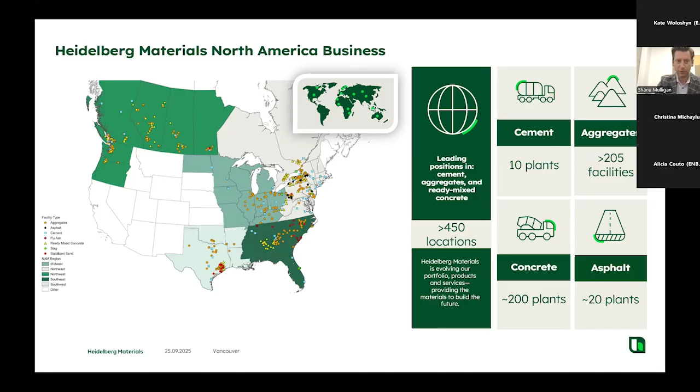I'm located in Calgary, Alberta, in what we call our Northwest region, which is essentially the Manitoba-Ontario border west to the coast, and also includes the states of Washington and Oregon. We're a little unique in that the Northwest region also has concrete pipe and some asphalt divisions, which isn't super common throughout our entire network. But cement, concrete, and aggregates are definitely the core of our business and what we're concentrated on in North America.

The one to draw your attention to is that 50% of our revenue will be generated from sustainable products by 2030. That includes products that meet certain carbon thresholds, but also those that incorporate circularity principles like the use of recycled concrete aggregate. I think we're currently at around the 35 to 40% range, so we've got a little bit to go to get to that 50% target by 2030.

Another target is 400 kilograms of CO2 per ton of cementitious material. That figure probably feels somewhat abstract to many on this call, but the old rule of thumb used to be that 1,000 kilograms of cement meant 1,000 kilograms of carbon. That's changed a little with some best practices rolled out globally. For context, the carbon intensity of our best plant in North America is located in Delta, British Columbia, just outside of Vancouver, and that has an EPD of 679 kilograms of CO2 per ton of Portland limestone cement out of that facility. So quite a ways to go to reach that 400 kilogram goal.

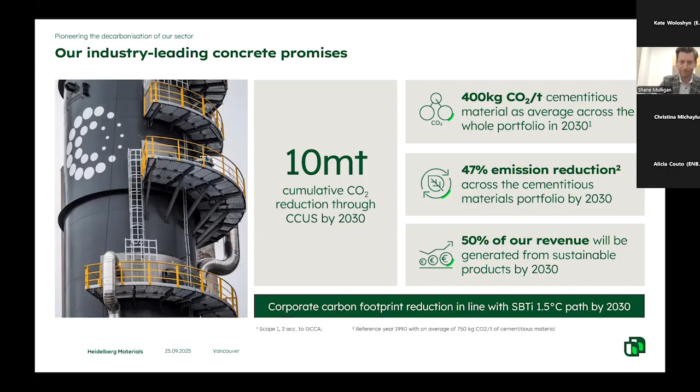Getting into more detail of today's presentation, we're here to talk about embodied carbon, and I think there's probably a general understanding of what that means among those participating in this call. But some of the drivers for embodied carbon are starting to come more to the forefront in our day-to-day activities. We have quite a number of different regulations and policies being rolled out across Canada and throughout North America that are focused on reducing embodied carbon in the built environment.

These are above and beyond the requirements you might be pursuing with the LEED Green Building Rating System or the Zero Carbon Building Standard with the Canadian Green Building Council. If you're in an area like Vancouver, the city of Langford, or even the city of Edmonton, there are some policies starting to affect day-to-day projects.

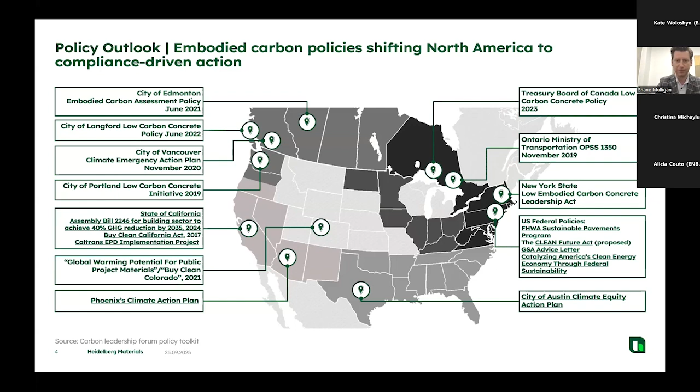When we're talking about embodied carbon, we're generally talking about concrete, because concrete, as you know, is one of the largest embodied carbon contributors to most types of infrastructure. When we're talking concrete in the built environment, particularly vertical construction, we find that 50% is generally the ballpark of where concrete contributes to the overall carbon footprint of a building.

Sometimes it's a little less, like in a residential single-family home, but it could even be more if you're looking at a very tall high-rise building with a very deep parkade structure. You could be looking at a concrete contribution to your project of about 70% or so, which creates a bit of a problem, but also an opportunity to really dig into concrete and look for lower carbon opportunities to lessen its impact on your project, while still getting the benefits concrete provides from a structural perspective, a climate resilience perspective, et cetera. So I'm going to dig into some practical strategies today to help enable that.

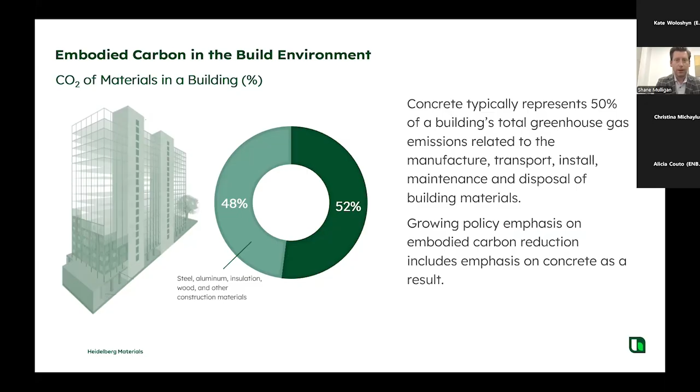Understanding that everyone's familiarity with concrete is probably at a slightly different level, I've got this slide to set a little bit of context as to why the carbon footprint of concrete is so high.

You may have heard the stats that concrete generally represents somewhere between 5 to 8% of global greenhouse gas emissions. That is a very large amount of emissions to be associated with one industry. If concrete was a country, it would be the third largest country in the world next to the United States and China. So there's definitely a lot of heavy lifting that the industry is able to do or needs to do to lessen that impact.

But this graphic helps to illustrate where that impact is coming from. It's a life cycle assessment of concrete as a material, where you're looking at the mining of the raw materials themselves, which generally is not a carbon intensive process. You're taking raw limestone to help make your cement, raw gravel and sand out of local quarries. It's generally just a little bit of dynamite, some on-site emissions associated with diesel trucks, etc. In the grand scheme of things, though, very small contributions to the carbon intensity of concrete.

Then you have the cement manufacturing process itself, and that really is the elephant in the room when it comes to the carbon footprint of concrete. Despite representing only 10 to 15% of the concrete mix, cement contributes somewhere in the range of 80 to 85% of the total carbon intensity of that concrete. So it is definitely the main contributor to why concrete is considered a carbon intensive material, and that relates to the process of making cement itself.

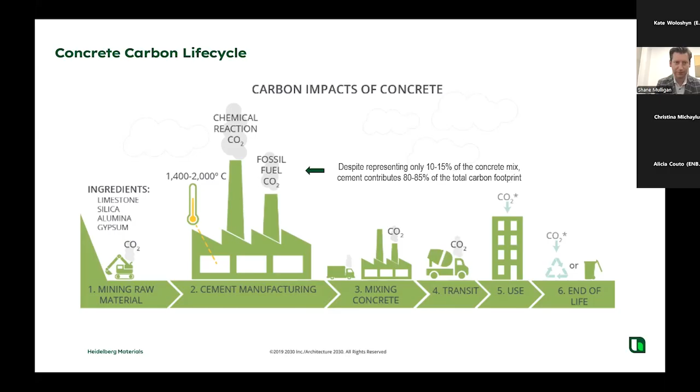And then from a use perspective, concrete is famously durable and long-lasting. Not a lot of maintenance or repair or replacement that's necessary over the life cycle of a building. Whether it's a 60-year lifespan or a 100-year lifespan, concrete stands up relatively well versus other construction materials. And then finally, at end of life, concrete is generally considered endlessly recyclable, being able to be put back into fresh concrete in some circumstances, or be used in other applications such as road base or subbase work with asphalt construction or concrete.

So having an understanding of where the emissions are coming from helped to understand how we arrive at low carbon concrete. And low carbon concrete is basically two things: it's reducing the carbon intensity of the cement that you're consuming. As a vertically integrated manufacturer of cement and concrete, we're busy on both sides of that equation, trying to reduce that impact. But more so on the concrete side, it's how do you make the most efficient use of that cement that you're putting into the concrete to help lessen the impact in the overall matrix of that concrete that you're making.

At Heidelberg, we have a branded low carbon concrete offering known as EvoBuild. EvoBuild is a tiered offering that provides increasing levels of carbon savings when compared against an industry average benchmark. In Canada, the benchmark we've utilized for this program is the 2017 Canadian Ready Mix Concrete Association industry-wide EPD.

That EPD was built by essentially taking a survey of a statistically representative number of concrete plants throughout Canada, figuring out what a typical concrete mix looks like for 20 MPa, 25 MPa, 30 MPa, etc., assigning carbon intensities for all the different constituents that make up that mix, and figuring out what an average carbon intensity is for 35 MPa, 45 MPa, etc. concrete.

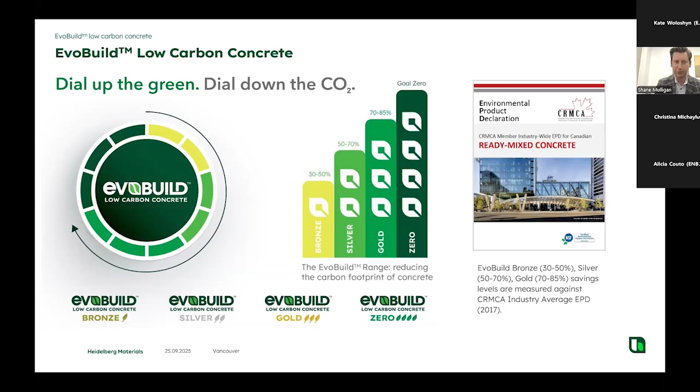The way we deliver these carbon reductions is really about materials engineering principles. Our technical service teams are generally looking at the different levers at our disposal to help reduce the carbon impact of the concrete matrix as a whole. That involves looking at the aggregate gradations to get better particle packing and more strength out of the aggregate structure itself, which helps pull out some of the cementitious content that might be going into that concrete.

Looking at different novel admixtures or different combinations of admixtures to help either reduce the water demand or increase the strength of the concrete mixes is another strategy that's becoming more typical. There's a lot of great research going on in that space to help strengthen the concrete and reduce the cementitious contents.

Secondary cementitious materials, that's looking at things like fly ash, a waste product from the coal industry, or slag, a waste product from the steel industry. Generally speaking, in Alberta we're concentrated mostly on fly ash. That's probably the most popular lever, and the one people generally have in mind when talking about lower carbon concrete—using materials like fly ash to displace the amount of cement going into your concrete mix.

But we're also trying to move away from that being the de facto solution. Yes, it is a significant lever we can pull to help reduce the carbon intensity of your mix, but it's not a full scale or holistic view of the overall carbon intensity of the concrete. We're trying to focus more now on the global warming potential of the concrete matrix as a whole, but nonetheless do utilize some of those SCM strategies.

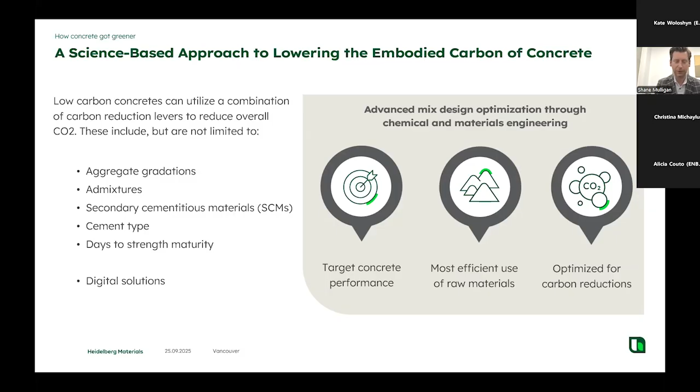They're just not going to be as low carbon as they would be if we're able to extend that schedule out. Many of these new solutions are also able to be enhanced with different digital technologies that exist, which I may touch on later if there's time. But at the end of the day, for any given application, we're really starting with performance. There are certain performance expectations that concrete needs to meet, regardless of the carbon intensity. Then we look at the levers to make sure we're still hitting performance, but pulling each lever to the maximum extent possible, balancing trade-offs with schedule and cost. Performance is definitely still paramount with the various solutions we introduce with our EvoBuild options.

But not everybody in the design space looking at reducing the carbon intensity of their project is familiar with the specifics and nuances that come with concrete. It's important to be at least educated on a high level as to the implications of some of these different levers and solutions I highlighted on the previous screen.

In particular, with the use of SCMs like slag and fly ash, it seems like a very easy lever to pull to reach 20%, 40%, 70% substitutions. But there are important trade-offs to be aware of with these strategies. It's really great to work with your concrete producer to figure out what works for your local project and environment, to have a good understanding of what that means. Generally speaking, as you substitute higher levels of fly ash or slag, you start to see impacts on the performance of your concrete mix, including increasing the curing time, so slowing down the schedule for strength gain within that concrete matrix.

So that might not be an option past 20% in fly ash, for example. As you move to 25, 30, 35% substitution, you might incur schedule impacts that are just not acceptable with your construction goals. Or even with things like pumpability, workability, or finishability of the concrete, the amounts and types of SCM you're utilizing can impact that. It's important to have that understanding in balancing what you're trying to achieve with your carbon reduction goals.

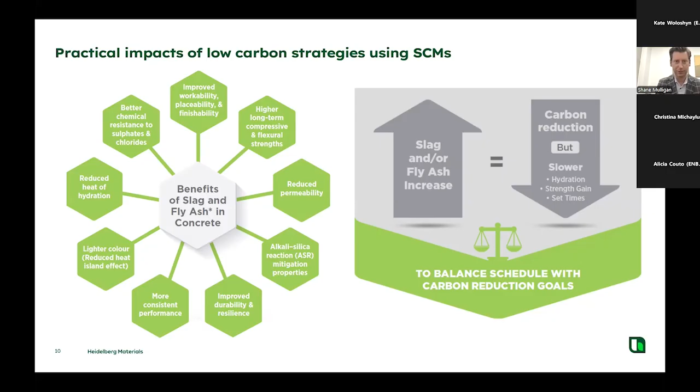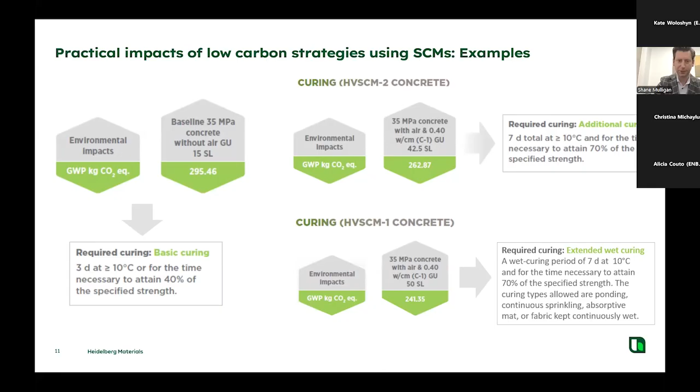Additionally, there are on-site considerations that come into play with higher levels of substitution rates. These graphics come from the CRMCA Low Carbon Concrete Guideline, where they look at different options for 35 MPa concrete at different substitution rates. At 15%, that's pretty much the concrete everybody's used to - there's no additional curing requirements on site. But as you significantly increase that substitution rate from 15 to 42.5 or even 50%, highlighted in the bottom right of the screen, there are additional curing considerations. Again, that's going to impact your construction processes, but also potentially the construction schedule. It's just making sure you're aware of these implications as you look at the different options available to you.

Exposure class is another important consideration. As concrete is exposed to more aggressive environments, whether it's chloride penetration, sulfates in the soil, road salting, whatever the case might be, the concrete matrix needs to be denser to stand up to that attack. So as you get more aggressive exposure classes, you get more dense concretes, which generally has the effect of increasing your carbon intensity because you're using more cementitious content to hit those higher densities.

Unfortunately, within environmental product declarations being published right now, it's not mandatory to highlight what exposure class your concrete is being designed towards. So we're finding a bit of an imbalance right now as to how EPDs are being used and compared, because that factor is not currently being listed on your EPDs.

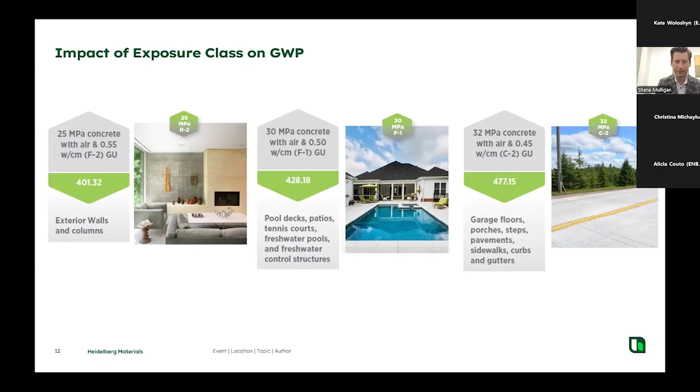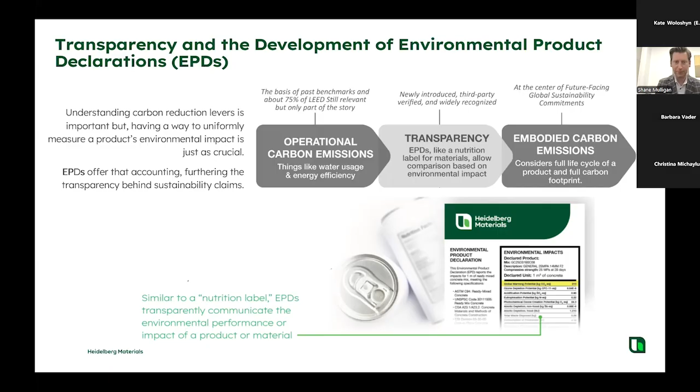That nutrition label concept is represented visually on an EPD, highlighting key environmental impact categories. Generally the one people are most interested in is the global warming potential, or carbon intensity, of the product - this one number here, 224 kilograms of CO2 per cubic meter.

But it's important to know that that one number is actually made up of three numbers, three modules within a life cycle assessment that represent the product stage of an evaluation, which looks at a cradle to gate scope of that product, comprised of these three modules.

Module A1 is the extraction and upstream production of the raw materials themselves, which, as alluded to earlier, in concrete's case is very much disproportionately driven by the cement content, more specifically the clinker content, which is the intermediate product of the cement manufacturing process.

Then you have module A2, which is the transportation of those raw materials to your production site, which is going to be dependent on both the haul distance and also the mode of transport.

Within our network of concrete production facilities, we typically find our best performing EPDs are coming out of our Metro Vancouver area. That's largely because they're able to transport aggregates by barge on the waterways running through Metro Vancouver. That option isn't available in every marketplace - you can't do that in Fort McMurray, where there's no water-based transportation.

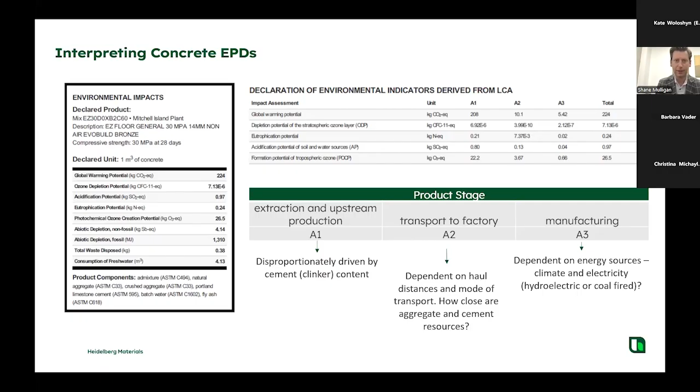Again, when we look at our network of concrete facilities, British Columbia is slightly better advantaged than Alberta because they're running on hydroelectric electricity, whereas we're functioning on natural gas. All of this is just to say that you could have the exact same mix design in Vancouver that you have in Edmonton, but you're going to have vastly different results because of these local considerations that factor into the ultimate calculations.

In terms of how we make an impact and start to lower our carbon beyond just the levers available to us, these next slides go into some best practices outlined by the CRMCA low carbon concrete guidance document, which includes general strategies about looking at smaller sections for your floor sections, maybe using a higher strength concrete - which might seem counterintuitive - to lessen the overall section you're looking at. Maybe reducing a slab thickness from 8 inches to 6 inches could be possible with a higher strength concrete, with a net benefit of a lower concrete impact.

Or looking at your column spacing within your buildings, or whatever the case might be. The document goes into some great detail there.

But the biggest recommendation within this document that I want to really echo throughout today's presentation is around the concept of collaboration and integrative design teams, because the most successful projects we've observed targeting lower carbon objectives come with collaboration between the concrete supplier, the general contractor, the testing agency, and the owner, generally represented by the designer.

Constantly working together to figure out what the objectives are, properly communicate them, discuss what trade-offs exist and which are acceptable and not acceptable at the early design stages, but also at touch bases along the construction process, are extremely beneficial to hitting your carbon goals for your projects.

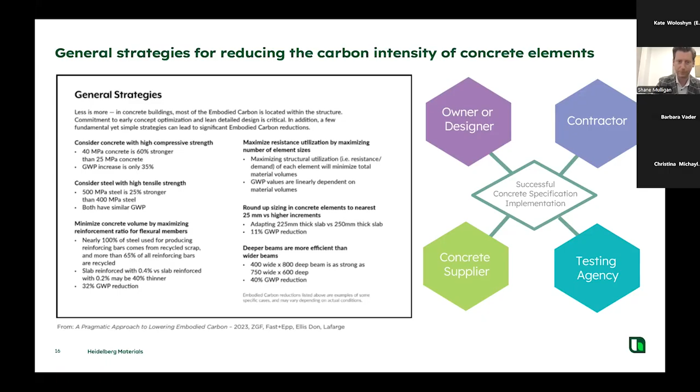Another big recommendation for encouraging lower carbon concrete in your project specifications is favoring performance-based specifications over prescriptive specifications. Generally speaking, in the built environment for vertical construction, most specifications we come across are performance-based - they reference CSA, which is a performance-based specification in Canada.

We tend to encounter more prescriptive specifications when looking at horizontal infrastructure with public work agencies or provincial agencies, where for sidewalks, for example, they might say you must have a minimum cement content of 300 kilograms of cement per cubic meter of concrete, a maximum amount of 20% SCMs, no SCMs as of November 1st, or whatever the case might be. These exist because there have been issues in the past, and they're trying to create a level playing field for all the concrete production in that local marketplace, but they're extremely prohibiting when it comes to being able to lower the carbon intensity of your concrete.

And so allowing your concrete producer to present different alternatives and pull levers that they're familiar with really helps in achieving your goals for carbon reduction.

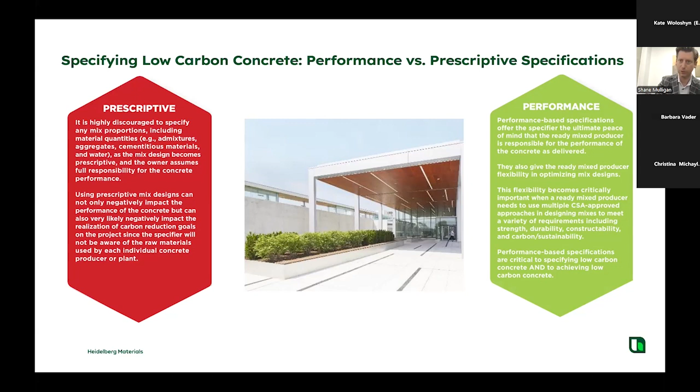But the main concept I'm going to highlight here for the remaining portions of these slides is the concept of a concrete carbon project budget. And this is a concept that is really growing in popularity across North America and Canada specifically. There's been some recent guidance that's been published that helps to provide details on how to accomplish the goal of a carbon budget for concrete.

But there's also starting to be some regulations and policies and codes and standards that are also following this approach as we look at the market and how it's responding to incorporating lower carbon goals into your projects. This includes the guideline to specifying low carbon ready-mix concrete in Canada, which is published by the Canadian Ready-Mix Concrete Association. It's where a lot of the images on the previous slide come from. It's where the details on how to implement a carbon budget come from as well.

We've also seen the recent publication of the ACI 323 low carbon concrete code, which also highlights the concept of a carbon budget. And there are a couple policies that have been introduced in Canada from the Treasury Board and the City of Langford, which is a small municipality out there in Vancouver Island, that have also adopted this approach that I'm going to highlight in more detail here today.

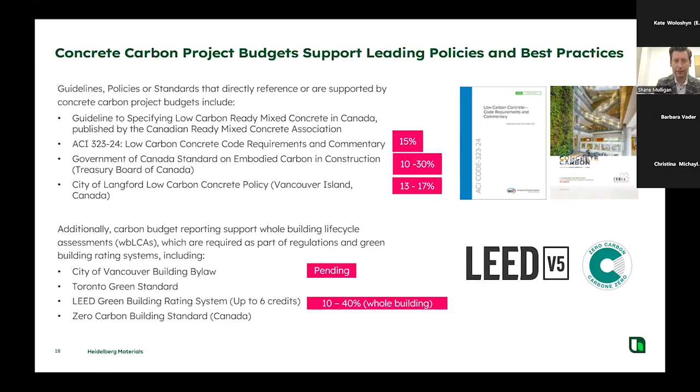And some are even going above and beyond. It's not just about conducting a carbon budget for your project, but then demonstrating a reduction against it. That when you actually go to procure your concrete, you're procuring concrete that can give you an EPD that demonstrates a reduction at a project level at these different percentage levels that are being introduced, from about 10% at the lowest end all the way up to 40% that we're seeing in the LEED Green Building Rating System version 5. So it is something of which to be aware.

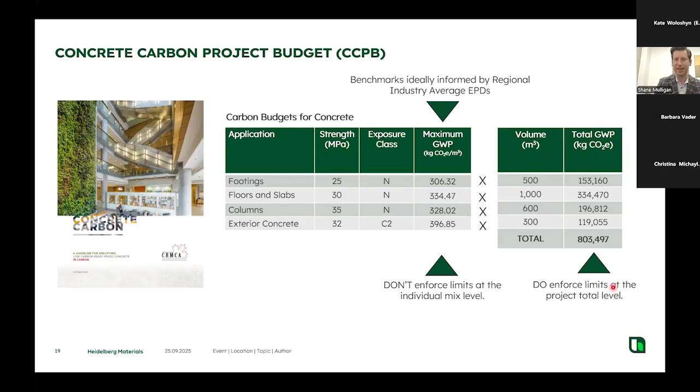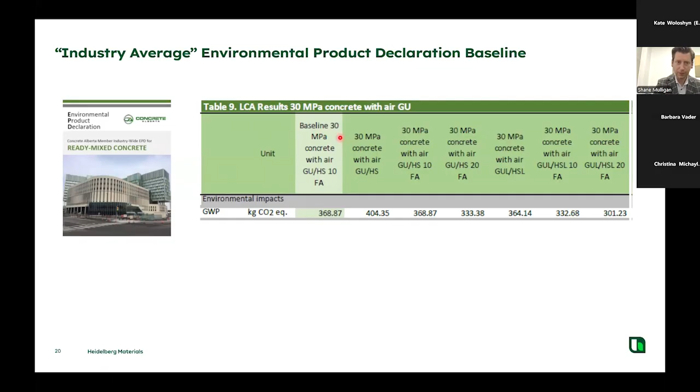In terms of where you should be getting those thresholds, the industry recommendation or best practice is to reference your local regional industry average EPD. So for Alberta, we have the Concrete Alberta Regional Industry Average EPD that outlines for various strengths of concrete what a recommended benchmark should be. And so in Alberta's case, they have a slightly lighter green color to highlight what a recommended benchmark would be for a concrete of a certain strength with or without air exposure conditions.

And generally speaking, across all the different mixes that are included within this EPD, it represents a type GU cement with 10 to 20% SCM use, which varies depending on the given element. And the caution I would exercise with using this document is that you really just want to concentrate on this light green number.

All the numbers that are located to the right are more designed for concrete producers so that they can demonstrate by submitting this document that if they're attesting that their mix is using a type GUL or Portland limestone cement concrete with a given amount of SCMs, they can suggest that their concrete is representative of some of these lower numbers and demonstrate adherence to the carbon budgets that are being set for these projects.

Some of the projects that we see being specified across Canada and North America are a little more aggressive, where they're trying to go right to the farthest end of the scale and pulling out the lowest number to put in their carbon budgets, which really limits the amount of concrete producers that are ultimately able to supply that project, because only a handful of concrete producers have gone down the road of being able to generate product and facility specific EPDs to demonstrate a specific number for that project.

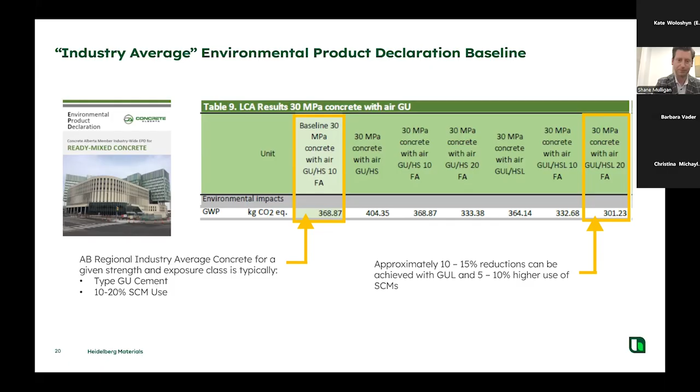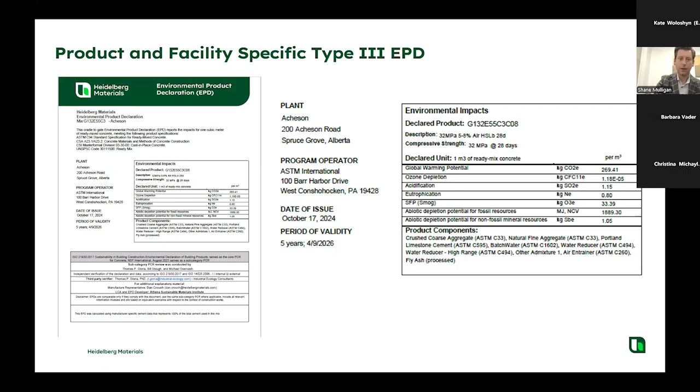So that's a really high level introduction as to what a carbon budget is, but it really glosses over a lot of the finer points that come up with concrete. Concrete generally is thought of as a commodity product that is only made up of 5 to 8 ingredients for any given mix. But those proportions really matter. Those implications that I talked about earlier when it comes to schedule and exposure class also really matter. And so it's also important to be aware of what is a traditional concrete versus what is a specialized concrete.

And there's guidance provided by the CRMCA documents, but also right in some of these regulations that are being rolled out by different government entities that try to recognize and accommodate what these specialty mixes would look like and increase the allowances within a carbon budget to properly represent them within a given project. And the recommendation is that basically when you are looking at a specialized concrete mix, whether it's a high strength requirement, cold weather application, or other specialty circumstance, that you're multiplying that global warming potential benchmark by 130% so that you're accommodating all the extra cementitious content that you're going to need to meet those performance considerations.

It's not a perfect number. It doesn't reflect the 24-hour early strength mix versus a 72-hour early strength mix, but it's at least something to allow for some of that flexibility in your design process, and an important step to be aware of.

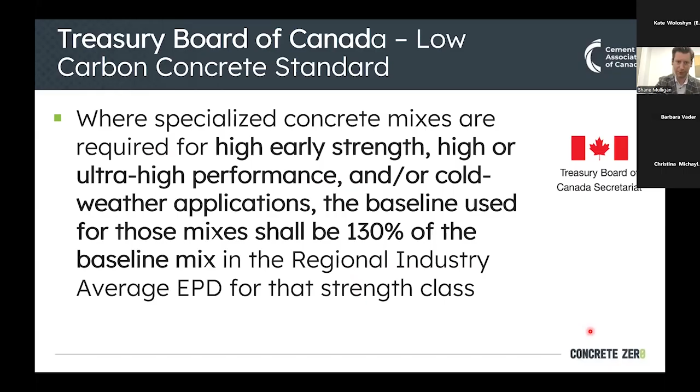But I, again, encourage you to reach out to your local concrete producers to talk about what the implications are for any given element, any given concrete mix that you're considering, and they should be able to give you some guidance as to what an appropriate buffer is for those types of special conditions.

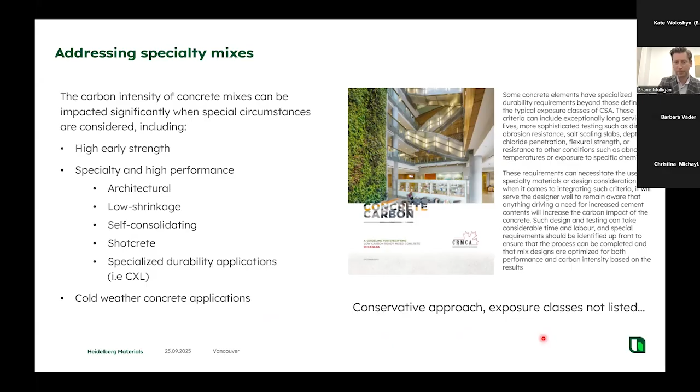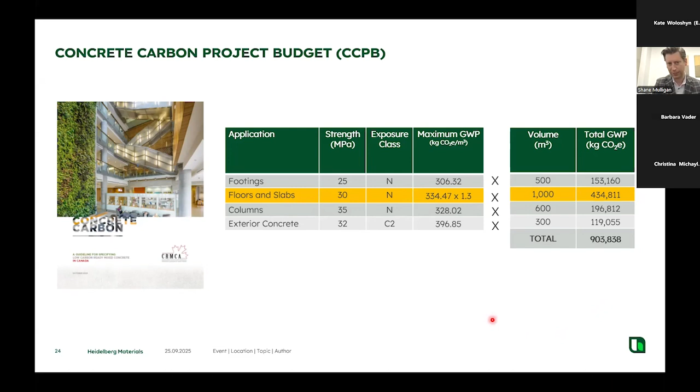And then this slide ultimately just kind of reflects, based on that previous example, if you were to implement for a floor and slab as an example, incorporating that 130% multiplier to increase your overall carbon budget as part of that process. But generally speaking, it's a relatively straightforward exercise that can be accomplished in an Excel spreadsheet. But what we're seeing as we're starting to encounter a few more projects that are starting to outline these carbon budgets in various markets throughout Canada is that all of them are wrong.

When you project out what a carbon profile is going to look like for a given project, you have your start where it's 0, you have your end 2 years down the line, 1.5 years down the line, where you're coming in at that 900,000 kilograms for that total project. But what we're seeing in reality is that you're off base before the project's even really started.

And this discrepancy that exists between what you've budgeted and what actually is occurring in the field is generally related to those specialty conditions, the high early strength concretes, the cold weather concretes, whatever the case might be. And it's just because those special considerations are not making their way into that budgeting process, that they're not being properly captured in that original projection.

And so again, what I really would suggest as part of this process on a go-forward basis, and one of the learnings to take away from today, is that you want to work together and have your conversations very early on from a designer perspective, calling on your concrete producers, having conversations with your general contractors about what does the schedule look like, what concrete options exist, and what are the trade-offs that are acceptable and not. These are very important in setting a more realistic carbon budget to get closer to what's actually occurring out there in the field.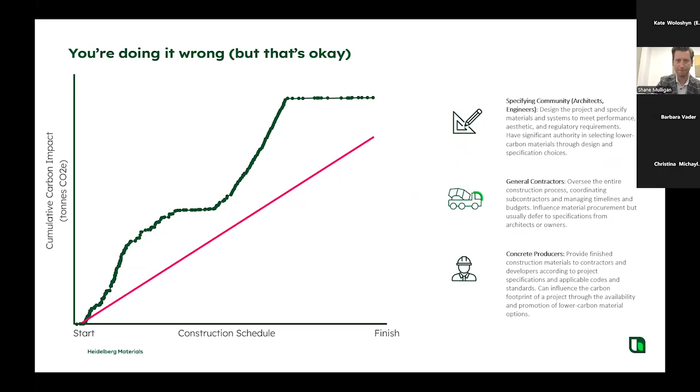And then the other thing to keep in mind is that carbon budgets are an iterative process, that you need to do these at a number of different project stages to get more and more accurate and encapsulate the decisions that need to be made as part of the construction process. So at a very conceptual design level, when you build a carbon budget, it's super high level. You're just kind of specifying out, are you considering wood or steel or a concrete building? You don't have a lot of details on volumes. It's a very high level design.

As you get further down the design process, you start to call out certain elements. You have a better understanding of what the exposure classes are going to be, and you can start to build out a first pass at what a carbon budget is going to look like. As you move into construction, that's probably the first opportunity you have to really start to accommodate schedule. As you're putting into your project specifications your carbon budgets and your objectives, you should be asking the construction teams that are bidding on that project to submit some sort of carbon budget that's reflective of the schedule they're ultimately putting forward. That will come with the concrete producer considerations from the conversations that they'll have on the side.

But once that project is awarded, it's important then to get together as part of that integrative design team concept and really walk through the different phases of construction and have a serious conversation about what is important versus what's not, and what's realistic for a carbon budget against the pressures of cost, schedule, performance, safety, and the like. And then it's important throughout the construction as well to maybe have milestones every 6 months to get back together, see how you're tracking against your carbon budget, what's still coming up, and what decisions can be made at that point. And then at the end of the project, have a little bit of a review to see how you performed, see where you went wrong, and incorporate those learnings into the next design.

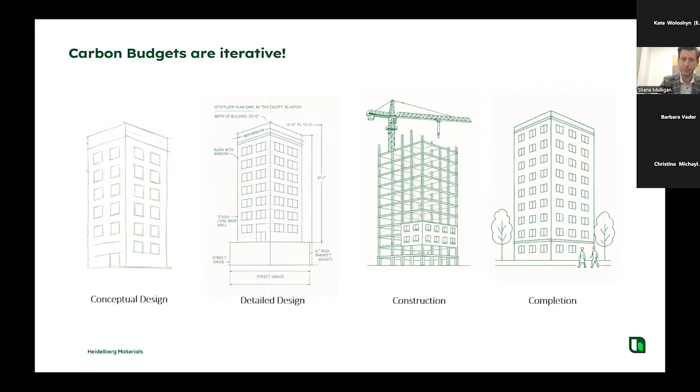A couple times I've highlighted throughout this presentation as well, when you're looking at schedule, that is the biggest driver when it comes to what's possible with low carbon concrete and what's not. So having an understanding of where your high early strength applications are is very, very important. But also consider what mitigation strategies exist. We have some newer technologies with maturity monitoring sensors that can tell you how well a concrete's performing, which can create a bit of a feedback loop as a project's ongoing to help you make incremental improvements as you go along with your high early strength concretes.

So it's definitely important to leverage the technologies that are available and the data that helps to back it up. Similarly, when it comes to considerations around workability, placeability, finishability, how smooth you want your floors, etc., those are considerations that have a pretty big impact on what's possible or not with low carbon concrete.